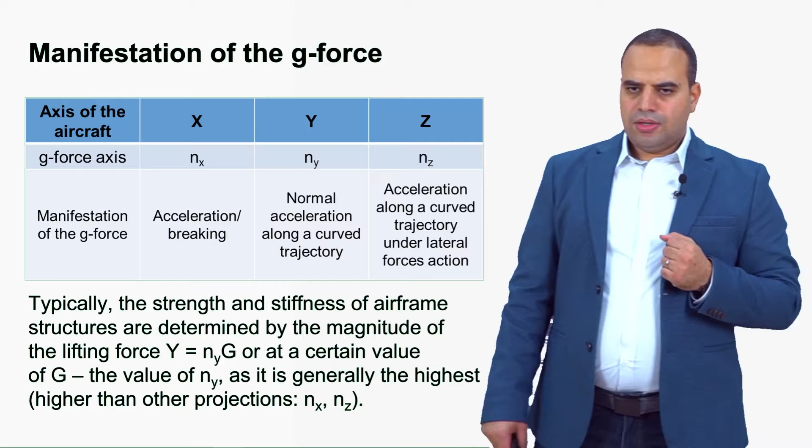Now, we can move a little bit on. So what are the factors that limit the operational ability of the aircraft in terms of the G-force? Besides the airframe capabilities, the maximum allowed values of the G-force are also limited by the physiological capabilities of the pilot, because a human's ability to take the G-force is determined by these factors: the magnitude, the direction, the duration of exposure, the frequency of exposure, and the physical condition of the pilot himself.

Because again, the G-force talks about how much force is applied by your weight. For example, if you have a 5G, that means that you're experiencing a force that is 5 times your weight, which is a very large force. But it also depends on the direction. If it is 5Gs down, that means that the blood is going to be pulled from your head down the body. And if it is minus 5G, in the other direction, then it's the opposite case, which is very dangerous for the pilots. And if it is lateral, that is also very dangerous, by the way.

And the duration of exposure is much more important. For example, if this G-force is applied for a few seconds, then most humans are going to tolerate it. But if it is applied for a longer period of time, like in a dogfight where the pilot has to push himself to the limits, this duration can be extended to 30 seconds or 1 minute or a few minutes, and then this is going to be an entirely different story, right?

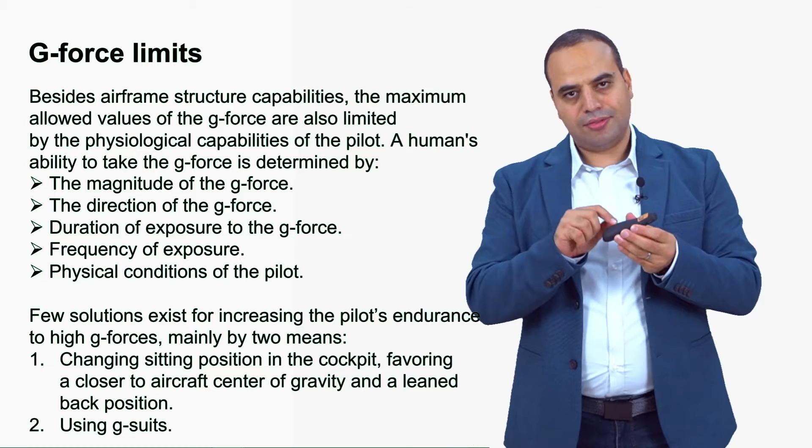These include changing his position in the cockpit, favoring a position closer to the aircraft center of gravity and a lean back position. Now, why closer to the center of gravity? Because if something rotates, the further away from the center, the more distance you're going to cover, and the more force is going to be applied on you, right? And the closer to the center of gravity, the smaller is going to be your motion

against the aircraft itself, and that is going to reduce the G-force. And favoring a lean back position, because if you lean back while experiencing vertical G-force, it is going to reduce the motion of blood from your head down, and that is going to increase your ability to withstand the G-force for a little bit longer.

And finally, using the G-suits, or anti-G-suits. This is a suit that pushes against the body when the aircraft experiences G-forces, therefore preventing the motion of blood from the head down, and preventing loss of consciousness and other consequences of this kind of motion of blood, right? So it dramatically increases the tolerance of the pilots towards the G-force.

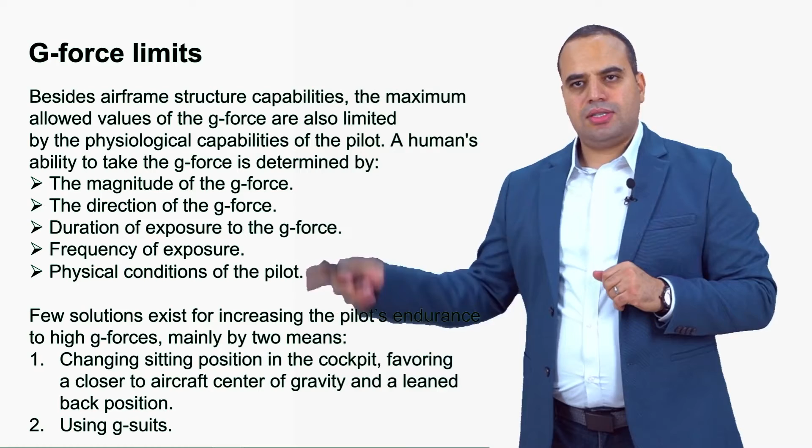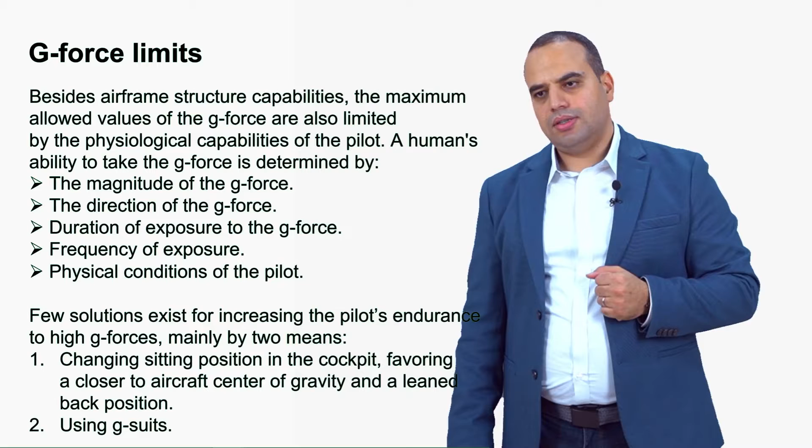But apart from the pilots, as said from the beginning, the first and most important thing is the ability of the structure itself to withstand the G-force. Why? Because this force applied to the structure will also lead to stress, and there is a certain amount of stress that the structure can take, and beyond that amount, there is a risk to break the aircraft. For example, if the G-force is applied at a certain direction or location on the structure where we can exceed the values allowed for this type of structure. And we can talk a little bit also about the design requirements, which have to do with the G-force and the airframe strength standards.

So now let's see the design requirements for the aircraft's airframe structure. By the airframe, we mean the structural part of the aircraft, the metallic part, the skeleton of the structure, right? So there are certain design requirements in order to ensure the aircraft's airworthiness, right?

So if the aircraft is airworthy, that means that it can fly. And in order to achieve that, we need to make sure that the airframe structure can have the maximum task completion efficiency, the minimum structural weight with sufficient strength and rigidity, because as we have seen, the weight is the enemy number one for the costs of the flight, right? So the heavier the aircraft, the more expensive it is to fly it.

And lowest possible life cycle costs complying with certification regulations, like, for example, the FAR for civil aircraft and so on. And the lowest possible life cycle costs can, for example, be achieved by striving to use as much as possible ready solutions and off-the-shelf components. So off-the-shelf components are components already in the market, so you don't have to design it from scratch.

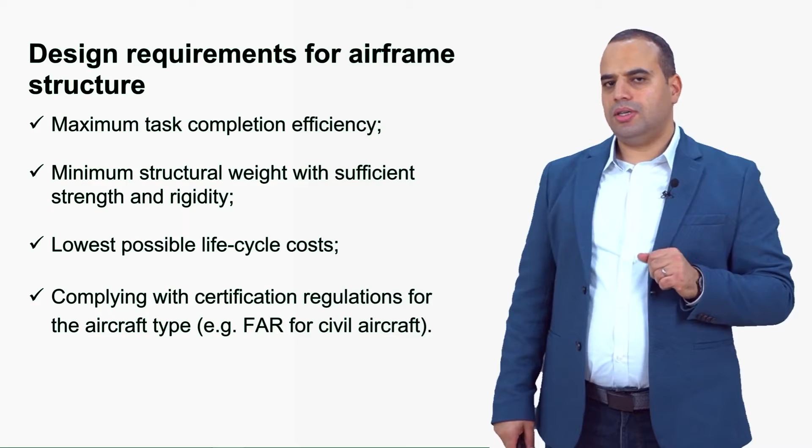Now, airframe strength standards are part of these guidelines. And one of the main conditions of flight safety is sufficient airframe strength and stiffness, although it has to have minimum structural weight, as we have agreed before. And all of these requirements are summarized and standardized, right? So standard means that it doesn't matter whether the aircraft is big, is small, is heavy, has two engines or one engine. These standards apply to a certain type of aircraft, for example, class A, class B, class C, and we're going to see how these classes are classified depending on the mission profile of the aircraft.

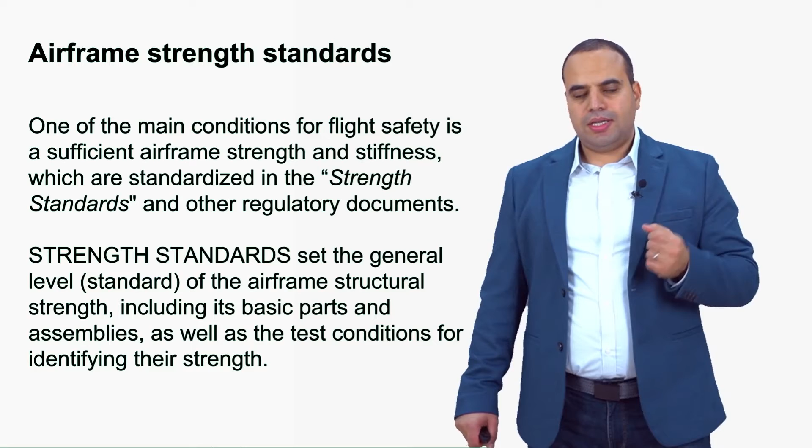So all of these requirements are collected together in what is known as strength standards and other regulatory documents. These documents set the general or standard level of the airframe structural strength, including basic parts of the assemblies, as well as test conditions for identifying the strength. So for instance, there are certain design cases or flight cases, for example, taking off, maneuvering at certain trajectories, entering the dive, exiting the dive. All of these points in the flight generate certain amounts of G-force, and those amounts of G-force are the design points of the aircraft. For it to be operable, it needs to pass tests at these specific points.

So these standards set a sufficient degree of strength of various parts of aircraft, which provides an acceptable, in fact the lowest possible, failure probability of the structure in the specified conditions during flight, takeoff and landing, and some other off-design conditions as well, for example, lightning strike, bird strike, and other things that happen, not all the time, fortunately, but they do happen during operation, and the aircraft is supposed to withstand a certain amount of stress that is a little bit higher than the operational stress it is exposed to every day. And operational means the maximum load during operation on the aircraft main parts.

Safety factors demonstrate the ratio of the ultimate destructive load to the operational load of the main components of the airframe structure. So that means that the structure needs to have a certain safety margin, right?

So it needs to have a certain reserve strength that is not used all the time, right? So it needs to have a certain margin. So for example, the load that is acting all the time needs to be a little bit far away from the destructive load, because that's the only way to achieve, for example, flight safety or a low failure probability, right? So to reduce the failure probability, we need to have a certain structure that is a little bit heavier than it should be, right? So it is a little bit stronger than it should be.

Strength standards according to maneuvering characteristics allow us to divide all aircraft into 3 basic classes: Class A, Class B, and Class C. So depending on the G-force that the aircraft is going to be experiencing, the aircraft can be maneuverable, like for example Class A, for fighters, aerobatic aircraft. So these guys are not designed for long range and heavy payload, so they need to withstand a very high operational level of G-force, which can be up to, for example, 8, 9, and in fact for fighters up to

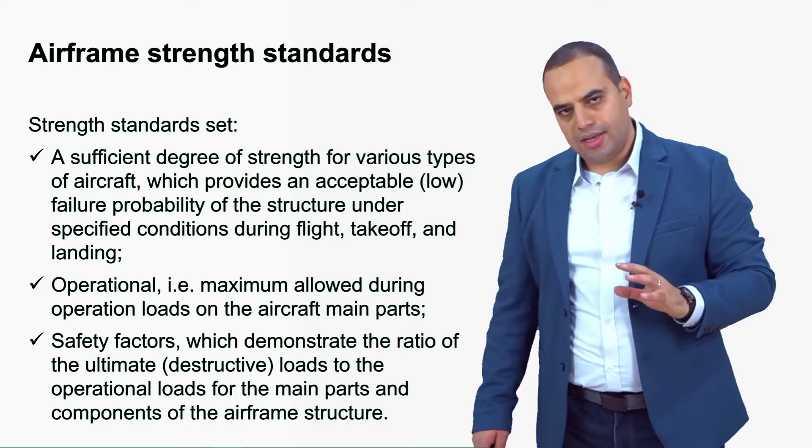12, right? So if the aircraft is designed to fly at very high G-forces regularly on a daily basis, then its structure needs to withstand an amazing amount, a crazy amount of active loading, which can be 12 times its weight, or 8 times, for example, here, the operational maximum G-force. So this is a Class A aircraft, and this Class A means that it will have certain design guidelines and certain strength standards, right?

Now, Class B aircraft, which is limited maneuverability jets, for example, smaller jets, which can have operational maximum G-load of 3.5 and up to 5. So this is still quite a very maneuverable aircraft, but it's not a fighter and not an aerobatic fighter, which can have, for example, 12 or 9 G-force, but for example 5. So this is, for example, tactical bombers, attack aircraft, tactical reconnaissance aircraft.

So it is still a military aircraft that needs to get, for example, as fast as possible away from a certain hazard, danger, or some enemy region. So it is not a fighter, but it still can be experienced, and it needs to be designed to withstand certain types of loads, so up to 5 G-force.

And finally, non-maneuverable airplanes. These are the long-range, heavy payload aircraft like transport aircraft, long-range bombers, passenger airliners. So these guys are not usually supposed to experience very large G-forces, and they are designed to experience a maximum of 2.5. In fact, if it is an airliner, then 2.5. If it is a military aircraft, like for example, military transport or long-range bomber, then it's 3.5, right?

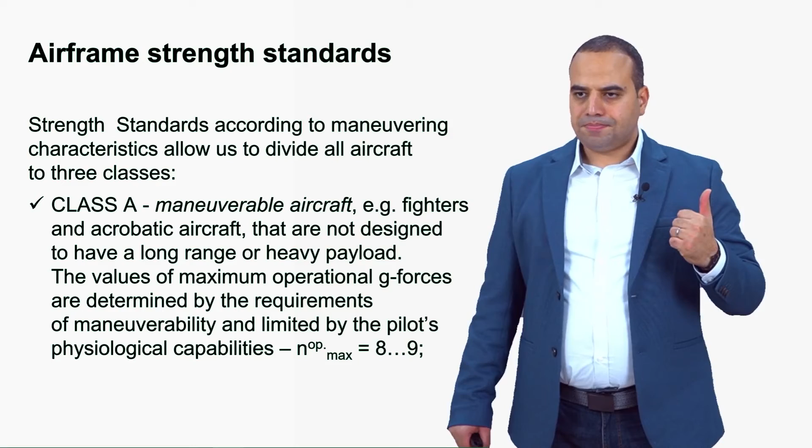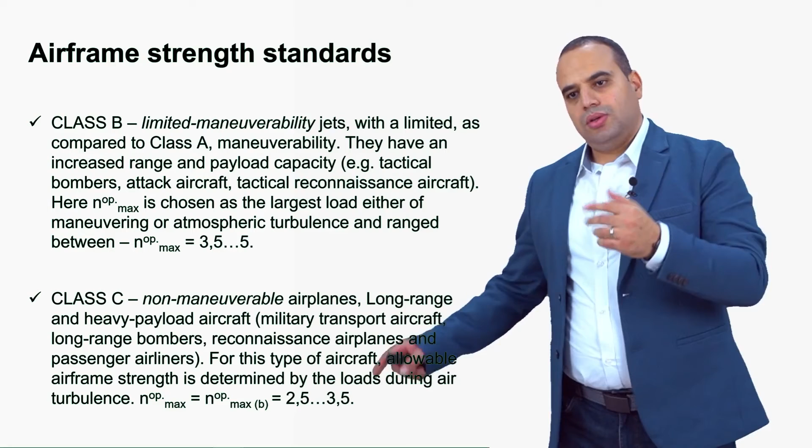So in this case, the allowable airframe strength is determined by loads during turbulence, right? So the turbulence is the worst case scenario, right? So if in this case turbulence is relatively not a big problem, then for this case, because the aircraft is not designed to fly at very high G-loads, turbulence is basically the worst case scenario where there is a risk of surpassing these kinds of values.

And finally here we have the stiffness standards, which regulate the allowable deformation of aircraft parts, because when we apply a certain force to a certain structure, it will deform, it will stress, and it will switch its shape, right? And the allowable deflections, angles of twist, as well as the value of critical speeds limited by aeroelastic phenomena like flutter, buffeting, and divergence. We're going to explain all of these words a little bit later in our course, or maybe in subsequent courses of aircraft design or strength of aircraft structures in particular.

And so these standards regulate the maximum speed, for example, allowable for the aircraft based on the margin of flutter, right? So there is a certain margin when the vibrations of flutter begin and the aircraft can break off because of these vibrations, right? So the margin of flutter is going to determine, according to these stiffness standards, the maximum allowable flight speed.

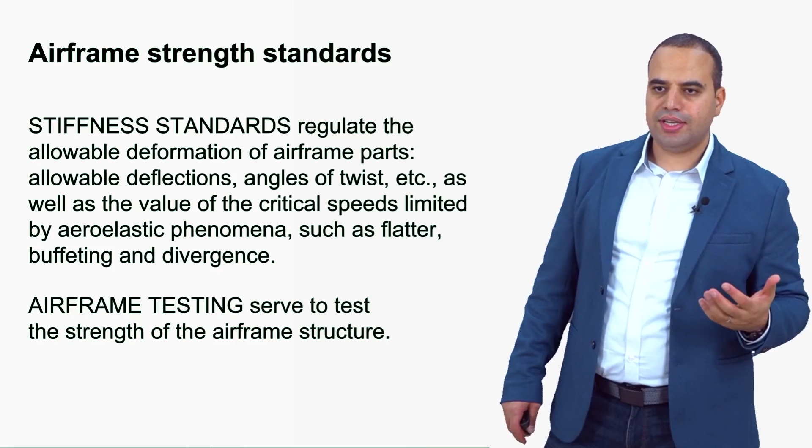So static we need for determining the failure or the maximum strength of the aircraft. The dynamic is carried out to evaluate, for example, structural strength under certain dynamic loads which change over time, and flight tests, which are used to determine the flight loads together with the flight characteristics, checking the existence of dangerous vibrations and flight regimes which are in real life, right? So which is in the real operational life of the aircraft.

So that's basically it for today's lecture. We're going to see the aircraft balance in